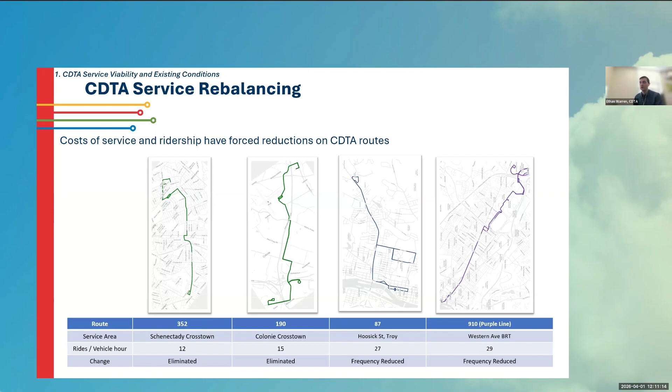So if you want to know the cost of operating this route, you take the runtime and divide it by the desired frequency. Let's say it's 20 minutes. So that would mean 100 divided by 20. You need 5 buses running at all times to provide that level of service.

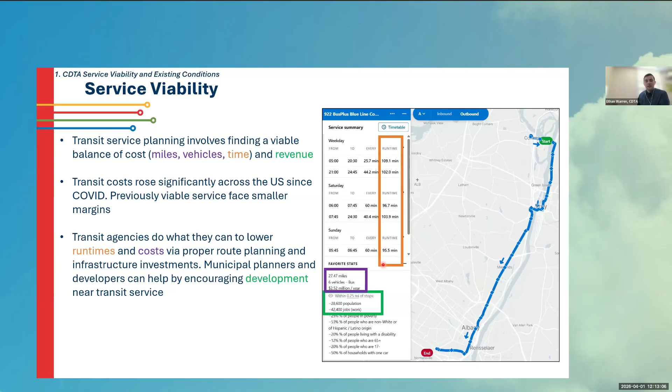So you can see I had to zoom in to show you these coverage areas because they're so small on the map. We simply cannot cover the entire region with enough service of high enough quality that people would actually ride. This is a problem we face, particularly in our region, but particularly in the suburban areas where there's just too much to cover.

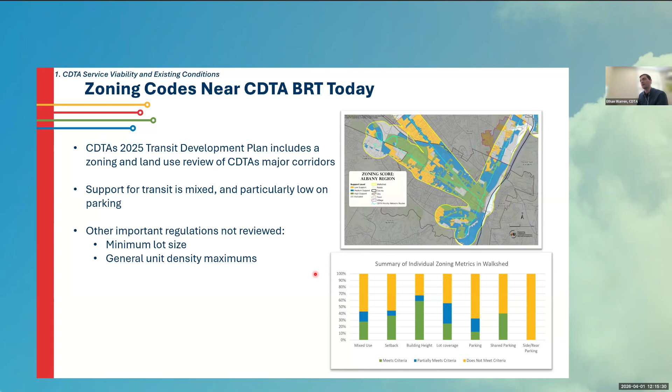So to summarize, land use has a heavy impact on the success of a transit service, and this is true for CDTA as well. Development which puts more people and jobs near transit greatly increases our viability and sets us on a positive path: more development leads to more ridership, leads to more service, leads to more development, and a positive upswing where maybe eventually we look at being able to do rail transit.

So next we'll talk about what transit-oriented development is and how it works.

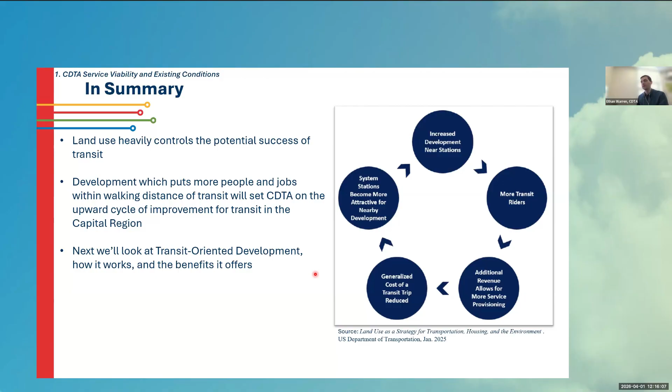I wanted to highlight this white paper the Department of Transportation put out in January 2025 called Land Use as a Strategy for Transportation, Housing, and the Environment. It talks about location-efficient places and how building near them, particularly transit stations, reduces the need for long-distance trips, increases the likelihood of people biking, walking, and taking transit, and reduces the probability that someone's commute is 40 miles and only doable by car. It calls land use policy the most fiscally responsible transportation solution that achieves many national policy objectives. So land use as a transportation policy.

This report is available online if you want to know more. I encourage you to give it a look.

Let's talk about TOD. What actually is TOD? In its most original, bespoke sense, transit-oriented development is a funding scheme for rail transit. Rail costs a lot to build, so the basic concept is that communities benefiting from the newly constructed rail service pay in, helping fund construction of the rail station and lines. Then that community benefits when the rail arrives, property values increase, and the potential for development increases. So it's both a short-term capital plan and a long-term sustainability plan for the transit service, because the neighborhood built up around the station is designed assuming residents want to walk, bike, and take the train or whatever transit it's built around.

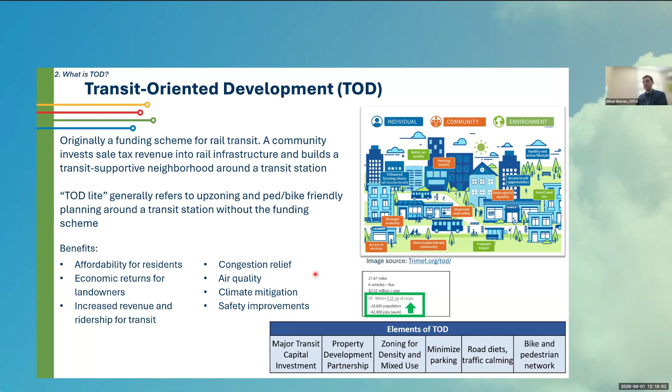In general, the approach is: if you assume people in your neighborhood want to bike, walk, and take transit, what do you do for them? Then the solutions become a little bit clearer.

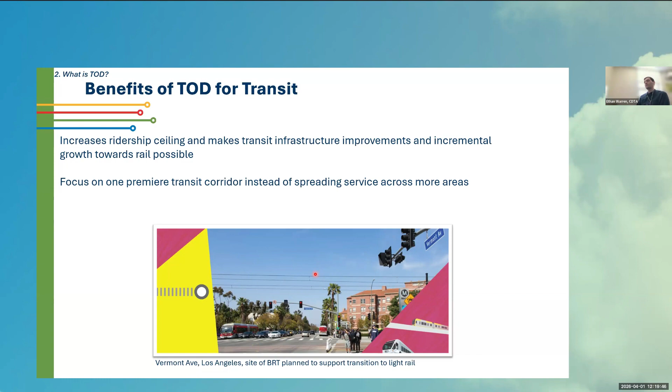So what is the benefit of TOD for transit? It increases the ceiling of possible ridership in a neighborhood. In a neighborhood which previously might have only sustained high frequency bus service, more development leads to more ridership, leading to the potential for bus rapid transit, and maybe in a few years you can level it up to light rail. The screenshot here is from a plan for Vermont Avenue in Los Angeles, where they built light rail-ready bus rapid transit — the original plan was BRT by 2025, light rail by 2030. We'll see how far they get, but the idea is you scale up incrementally.

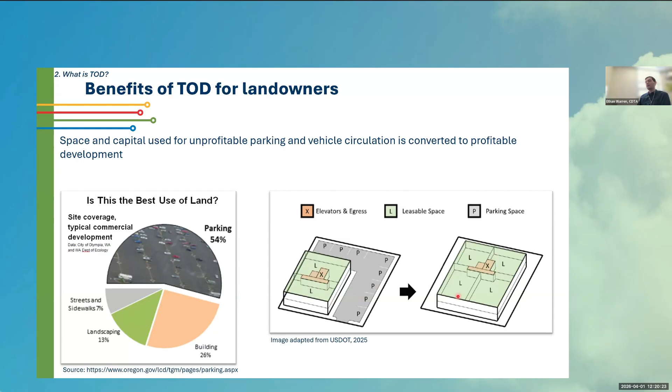So what is the benefit of TOD for landowners? Do landowners want TOD? In theory, they should. The main change on a property under transit-oriented development is you have to build less parking, and parking is not a profitable use — it costs you money, people expect it to be free, and it basically has to be paid for by the actual profit-making building on your property. When you build less parking, you can build more profitable space, and your property becomes more valuable.

Another benefit in a TOD zone is called unbundling parking and rent. Usually an apartment rent includes things like parking, but just like bundled utilities, the parking isn't really free — your rent is higher because parking is included. In some places, they legally require that parking rent and housing rent be unbundled, so you rent your apartment and can separately choose to rent a parking space. I've learned this actually happens a bit in our region — a student told me his apartment offered the unit plus a parking space for an extra $150 a month. For someone who doesn't own a car, this is another way to save money, and TOD makes it all the more possible to offer this kind of benefit.

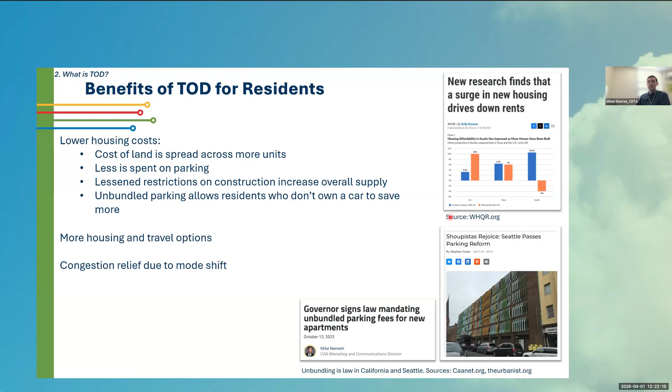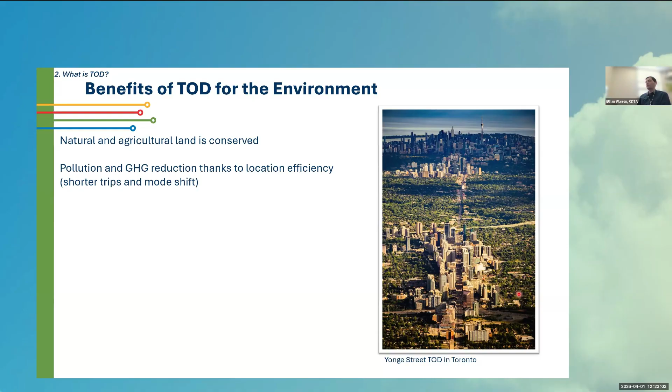So, benefits for the environment. Think of transit-oriented development as a release valve for development demand. There's a certain amount of demand for new housing and development in your region. If you build a lot more in one place, you'll have a lot less pressure to develop elsewhere. In the capital region, suburban development is building on top of former forests and agricultural land, so that pressure would decrease. Environmentally, you should also expect less pollution and greenhouse gas emissions as people are offered more location-efficient places to live, shorter trips, and mode shifts from cars to greener ways of getting around.

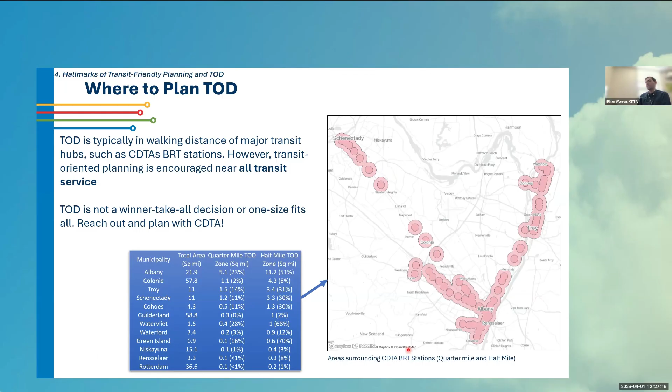But I wanted to highlight especially the town of Colonie: even with this, the farthest, biggest imaginable version of TOD for the region, it would only take up 2 to 8% of the land in Colonie. You'd be left with all the R1 single-family zoned areas untouched. So given what we've heard about the relative demand for car-free living, this seems a lot more viable, right?

So the zoning hallmarks of transit-oriented development are pretty straightforward: density, mixed use, mixed income, a neighborhood planned around a transit station, and planned around a vibrant outdoor street life.

Parking management and limits on parking, no parking minimums, and pedestrian and bicycle friendly design. I wanted to highlight as well, when I say mixed use, that doesn't mean necessarily retail on the bottom floor and residential above. Mixed use can also be horizontal.

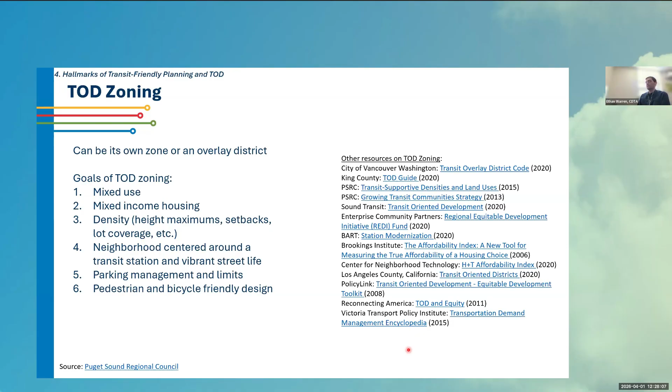The main problem is just massive R1 single family exclusive zones where the nearest commercial or retail location is 10 miles from your house. That's the problem.

As far as street design goes for transit-oriented development, I wanted to talk about two main aspects. The first being first and last mile connections. There are two critical ways in which a street network affects first and last mile connections to transit. Like I said, catchment area of a quarter mile, but in reality the catchment area could be a lot smaller depending on the street network.

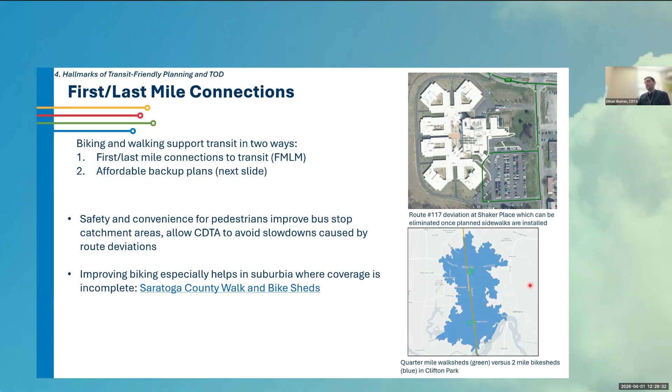Secondly, I wanted to talk about bike and walk infrastructure as an affordable backup plan for transit. Even in the best transit areas, transit's not always going to be the best option for your trip, right?

The thing we want to avoid is transit riders owning a car just in case, because we know how expensive it is to own and operate a car on an annual basis. There's also so many more options nowadays that didn't exist 15 years ago.

CDTA runs our own bike share program. We run our own car share program. There's transportation network companies like Uber and Lyft, and electric bikes also have made biking much more accessible. Your options outside of driving a car are much more than just transit, and TOD should take that into account.

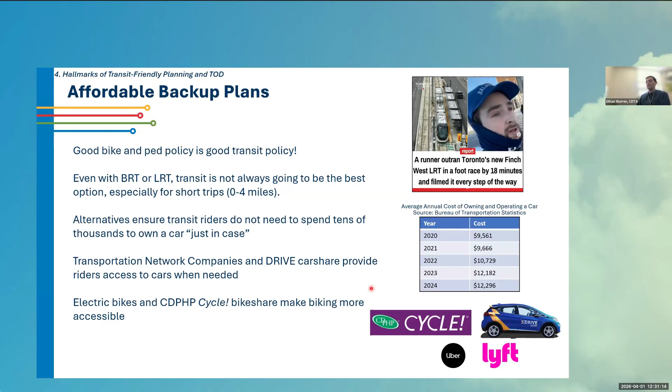2 ways each direction, center turn lane, 50-mile-an-hour arterial with commercial and retail all along it. It's not a great place to walk. In a place like this, it's essential that you don't just leave the driveway as the entrance into your property. A sidewalk into the property makes all the difference. If you don't believe me, just walk on a driveway like this in the middle of a peak traffic period, and you'll be watching your back the whole way, right?

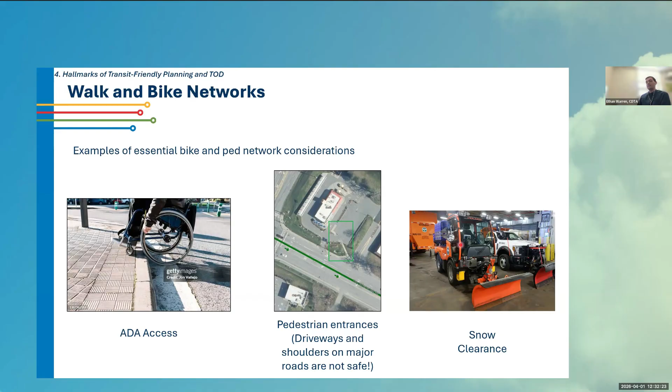It's not safe. Snow clearance, of course - we spend all this money on sidewalks, and if your sidewalks aren't clear, what's the point of having them, right? Bike lanes, I've talked about these before, essential for the safety particularly of people who are less confident riders. Lots of studies show you build a bike lane and the bikers show up, right?

I also wanted to emphasize rail to trail and power line trails. In our region, National Grid recently gave a presentation about their process by which a municipality can have a multi-use path built on their right-of-way. This is an underutilized resource, I think, nationally. Utility right-of-ways, kind of like rail lines, are a nice straight line through the neighborhood with minimal crossing points with regular traffic, so they have great opportunities for - I call them a bike highway through your neighborhood.

Access management, a term that's getting a lot of circulation these days. Think of your typical arterial where every lot has its own driveway. It's scary to drive on it, it's scary to walk on it, and it's not safe.

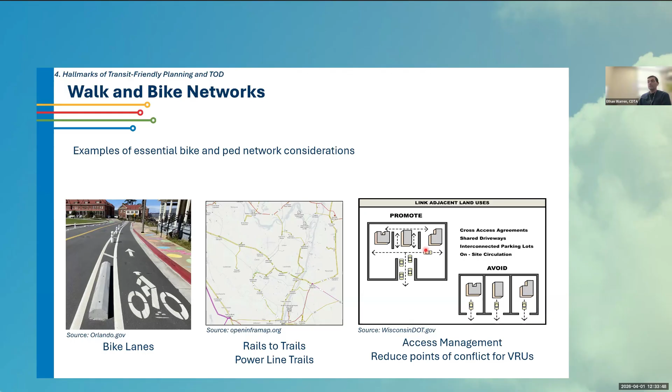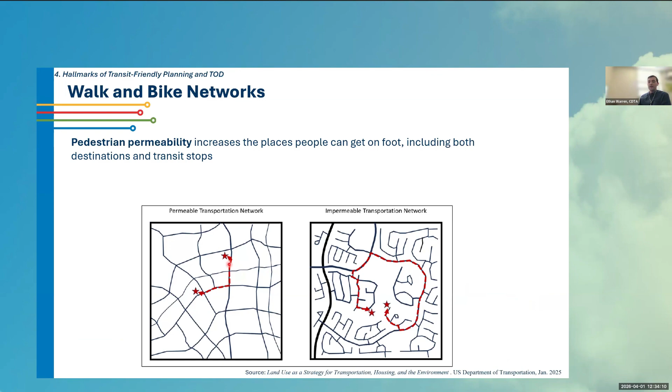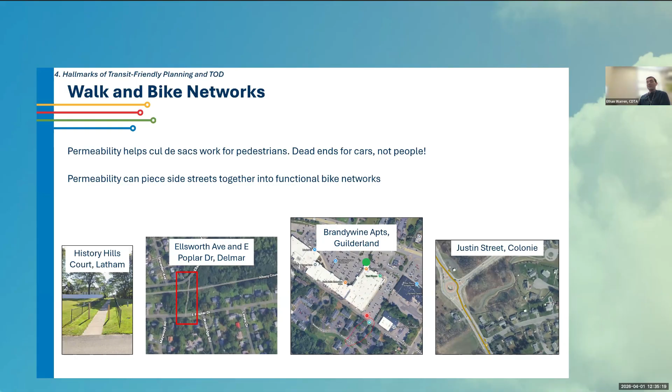And I like this a lot because I think it'd be hard to fight uphill against the whole cul-de-sac concept, and it's much more doable to retrofit it in a way that really works for bike and ped. So I really like these, and I hope I've sparked some interest.

So now I'll hand it off to Troy, Eric Ferraro, and Angelina Apindem to talk about Troy's zoning code and how Troy is helping out transit through its new zoning code and eliminated parking minimums and other things.

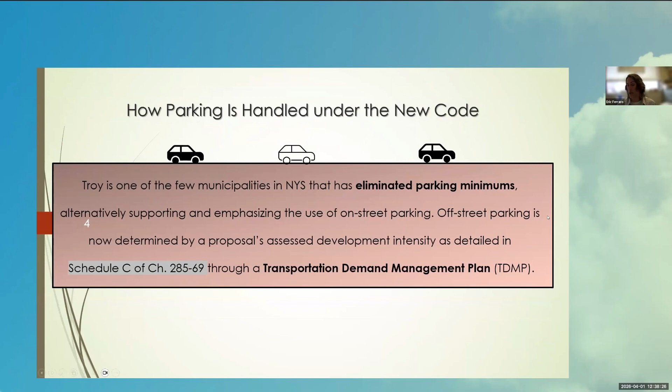So as I just kind of indicated, we eliminated the parking minimums, and the assessment of parking kind of follows a schedule and not a sporadic use of circumstances, number of employees or occupant load as previous in our old zoning code. What we use to kind of indicate this, we gauge the parking by its development intensity now.

So each neighborhood has its thresholds for things like the number of bedrooms, new construction, renovations. So they do vary, and in some cases it's not explicitly known whether or not exceeding these would be more of a detriment or have a negative impact on the community. So what the code requires is if an applicant or developer seeks to exceed these allowances, then they have to supply this transportation demand management plan.

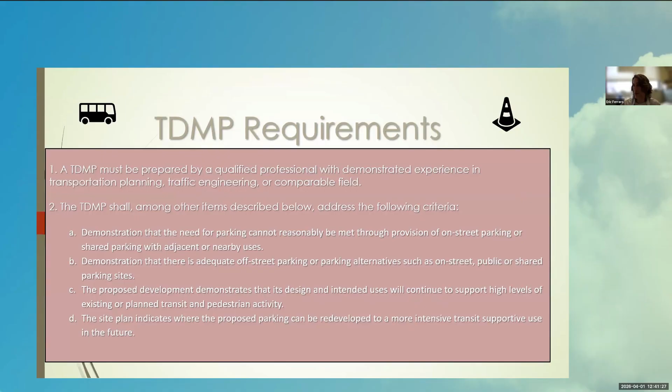So the report can go into detail, or it can lightly address some of these things. We've seen various different renditions of TDMPs. And so I think realistically eliminating the parking minimums here and having this opportunity to provide more details as to why an applicant should be able to exceed those things, if they wanted to implement certain things that the city no longer sees as central to transit use.

The immediate impact of having no parking minimums is probably most notably felt in the ZBA. We've seen a reduction in requests for parking variances by nearly 100%. I think I can maybe come up with 3 examples that have been requested for relief in the past 3 years, which is pretty substantial considering that constituted one of the most numerous requests made to the ZBA.

So eliminating off-street surface parking lots - the code does make some serious impacts through this. In place of these elements like parking lots, you might find more pedestrian site plan elements, connectivity, sidewalk connectivity, and parking surface connectivity.

Again, just to touch on Ethan's, or build on his momentum there, the promotion of walkable and bike sharing or bike riding infrastructure kind of goes hand in hand with some of these initiatives. So in place of parking stalls, expansive parking lots, the code does require that we mandate bicycle infrastructure. It's not really listed in detail on here, but we have a couple different bike infrastructure requirements that center on long and short term.

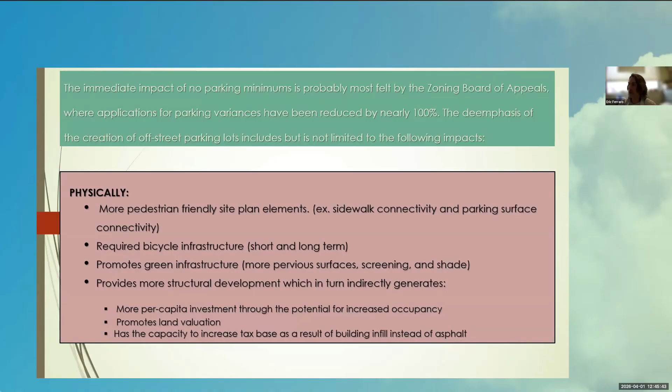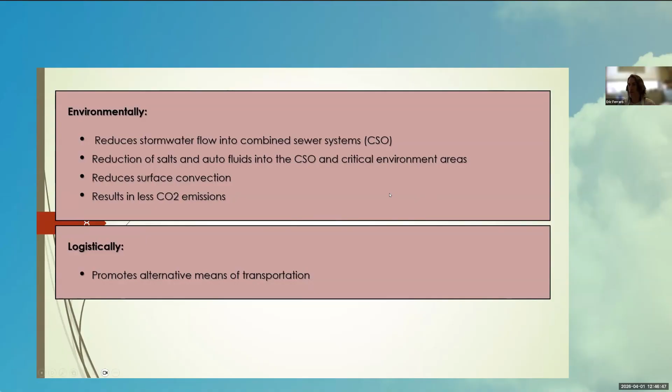What we would look at as far as alternatives is, again, taken right out of our code, 28569 F3D, which includes but are not limited to walking, cycling, car sharing, and transit promotion and education, parking cash out programs or unbundled parking market rate pricing, shared parking facilities, support for bike share programs, and enhanced bicycle parking and related facilities.

Support car share services and facilities, providing carpooling or van pooling programs or benefits, participating in bus transit systems, or access programs and transit to work shuttles.

We had a project recently approved where I believe they have a partnership with CDTA at 1818 Fifth Avenue, where those renting space are provided with, I think, annual transit passes or CDTA bus passes.

Partnering to establish enhanced transit facilities, such as bus shelters, and participating in guaranteed ride home programs, provision for alternative work schedules, and promotion of live near your work programs, roadway improvements adjacent to the site that will help encourage transportation alternatives. I'm running short on time, so I'm going to try to wrap this up.

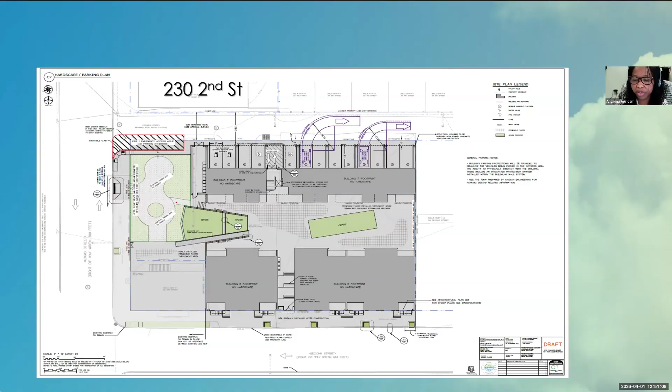They were going to encourage employees to use carpooling, as encouraged by the zoning code. So with the 32 parking spaces they were required to provide, that would be adequate for this particular project, and there was no need for them to provide more than that. They were going to make use of other alternative parking available on streets and carpooling, as mentioned.

So Angie, there are other projects, but these are some of the key ones.

Apologies for interrupting, Angie, but there was just a little typo there. It's actually 62.5 spaces that they would have been required to provide, which would have drastically changed the site plan. I just wanted to point that out because it's a substantially different number than what we've allowed them to get approval for. But apologies, Angie, please continue.

Yeah, I think that is it.

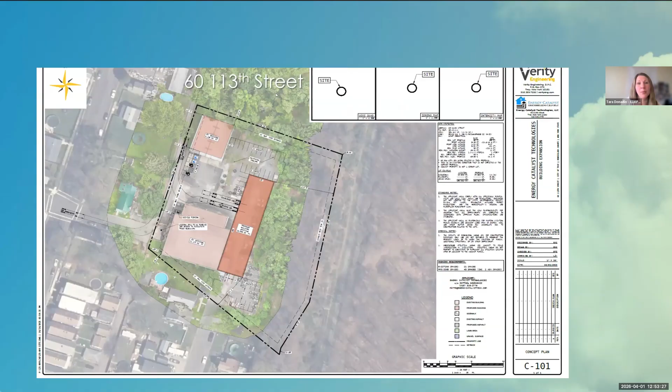Somebody did previously ask if Ethan could share a map of the zoning compatibility near CDTA lines, and he did share a link in there where that can be found.

Okay, we have a question. What are your thoughts about autonomous driving services like Waymo? Is there a plan for allowing those in some geo-fenced areas? I see a lot of them now when I travel to Austin. Autonomous buses are also something that we're trying to look into.

It does seem kind of like vaporware to me, maybe if I lived in Austin I wouldn't be saying this. I don't know where they run them in Austin, and when we talked to some vendors about doing it in the Albany area, it would have been on the UAlbany campus where we have a controlled environment, and it's a little bit safer to do it.

It is included in our transit development plan that we should continue to look into autonomous vehicles, but we have no plans to purchase autonomous buses right now or anything like that. As far as the broader transit-oriented development plan, autonomous vehicles would make it much more accessible for a car share program. A car share is usually located at one spot, so you always can get to it at the same place. But if it was autonomous, then you rent the car and the car comes to you.